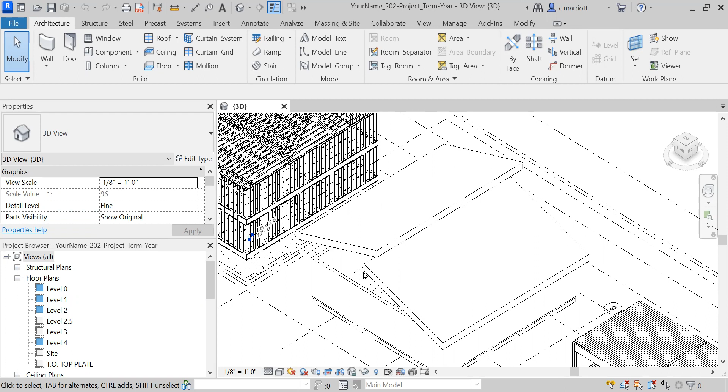In this next step, we're going to be adding some structure. So we have the walls for the metal framed structure in place, and we have these roofs. And right now there's no structural support for them.

If we go to section number 1 here, there is a footing that's located at the center of the structure. And so to support this, there's a number of ways that we could have done this. There could have been a bearing wall that ran down the middle of the structure, but if we want to keep it open, it may be better to go to a column and beam kind of configuration.

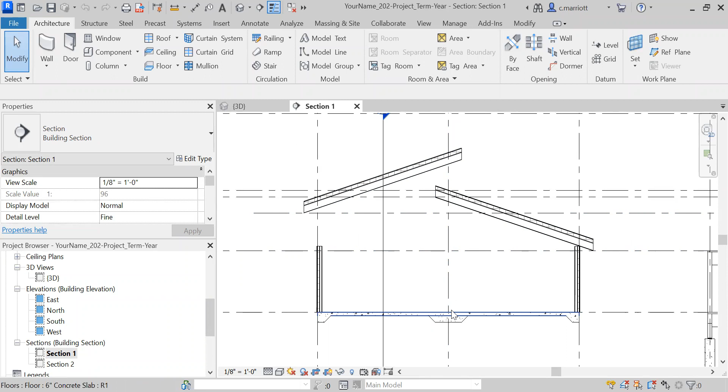So I'm going to place 3 columns going down the middle. I'll go to level 1 to show you where they're going to be. One column will be at the center, and then one column will be at the perimeter wall and this perimeter wall. So the first thing that we need to do is bring in some columns.

We could have framed this entire structure using the light gauge metal, but sometimes you'll find that you want, for some reason or another, to have a large opening or something like that. And so you might integrate other types of construction. So these will be made out of steel, not light gauge steel, but steel like you would frame an entire high rise in, for example.

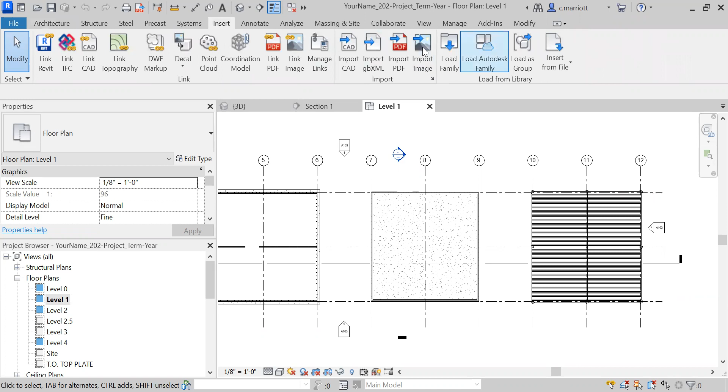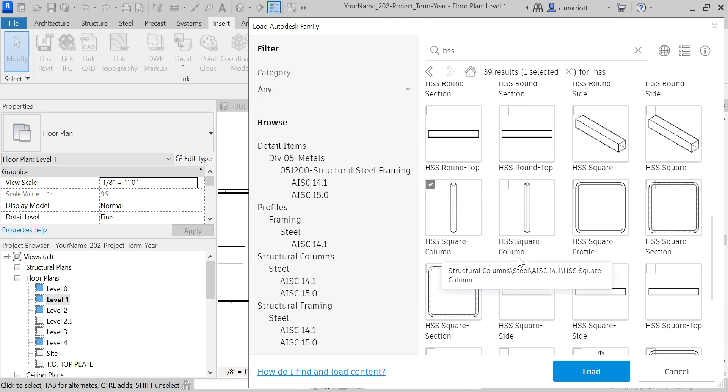So I'm going to go to Insert, Load Autodesk Family, and I've already started looking up HSS as a type of steel member. I'm going to scroll down till I get to HSS square column. I'll go with this 14.1 version. It probably doesn't matter. We're just starting off with some rough ideas about the sizes for these things.

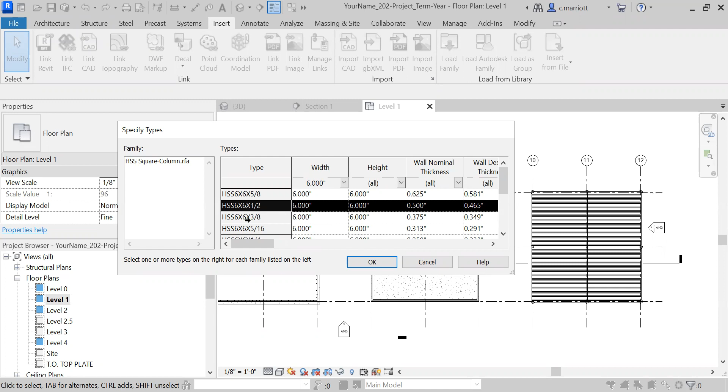And when the table loads here and I need to select one, I can narrow it down by going to, let's try for a 6-inch one. So when I click on 6 inches, I see anything that's 6 inches by whatever height. And then I see a number of thicknesses. Again, without going through all the structural calculations, I don't really know exactly how big this needs to be, but I'm using an approximation here. I'm going to go with an HSS 6x6 by half, and click on OK.

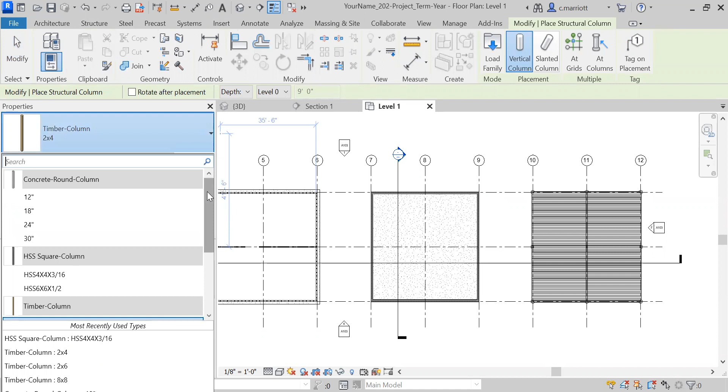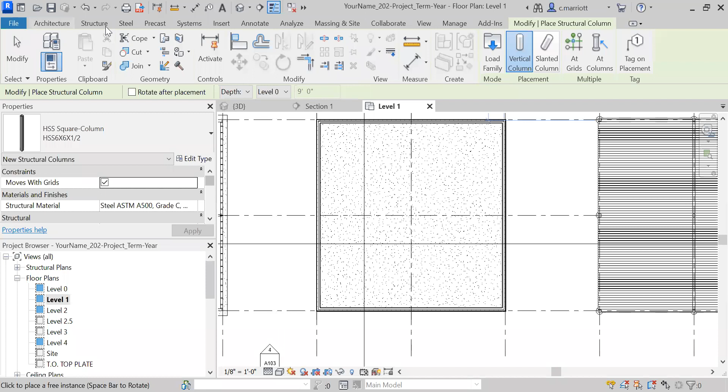Now I'm going to go to Structure and Column, and I should have a bunch of different columns in here. The one I want is going to be the one I just loaded in here, HSS 6x6, and I'm going to place it. It's going to be a vertical column. And it's going to go right here at the intersection of these 2 column lines. So let's see here. Did I fall out of that command? Yeah. And I'll click right here.

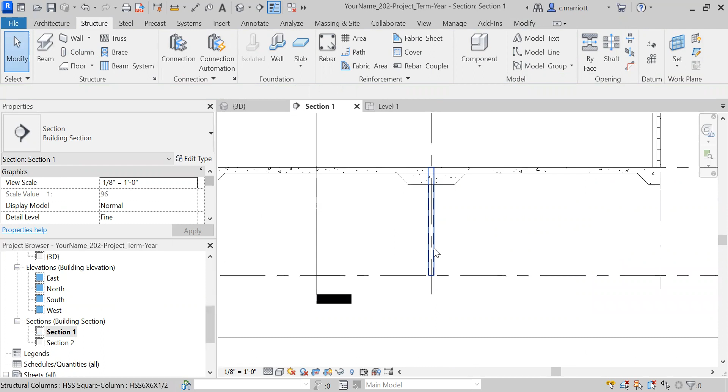And it's going to place one, but it's probably not the right size that I need. So let's take a look at how it is in section 1. Yeah, it's not where I need it to be at all. I'm going to click on that, and I'm going to start making some changes. I'm going to bring it up to level 2.5, and my base level is going to be level 1.

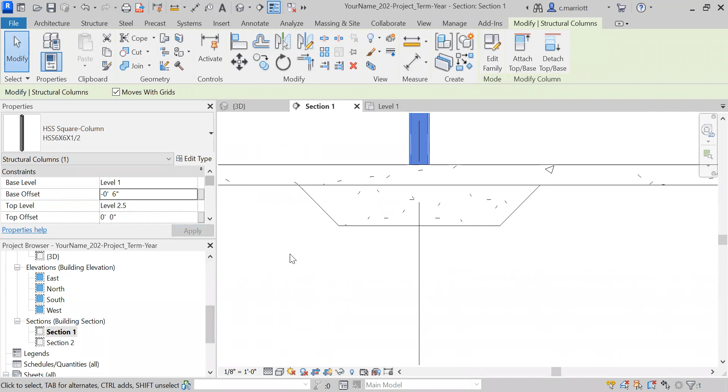Right now, the slab would probably be poured after this was located, and I want it to go down to where this footing is. So let's measure, our slab thickness is 6 inches. So I'm going to click on that column, and I'm going to bring it down -6 inches and apply. Okay, so now you can see it goes down to the footing. Maybe those footings needed to be a little bit deeper. We'll leave them for now as they are.

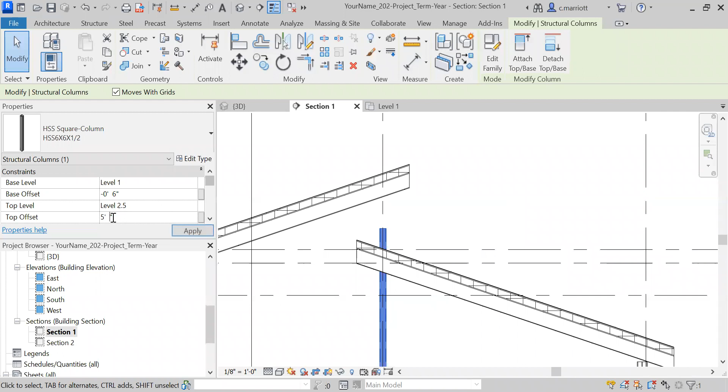And then I'll click on it again, and I want this column to go kind of all the way up here, and it's going to support another member that I'm going to bring in. But for now, let's just assign a dimension for it from level 2.5. Let's bring it up to 5 feet 6 inches above there. Now, again, we may want to make some adjustments to that, but we'll leave that as it is for the moment.

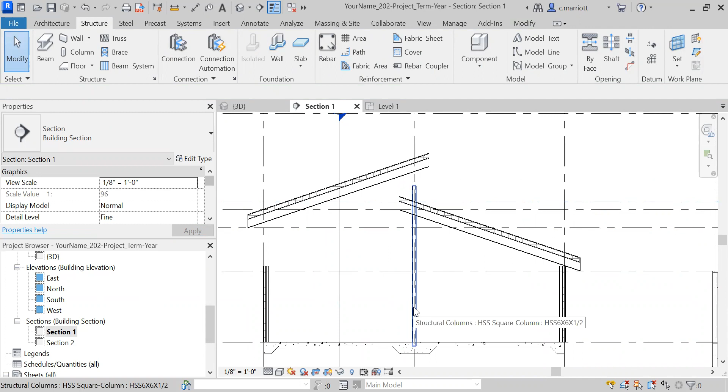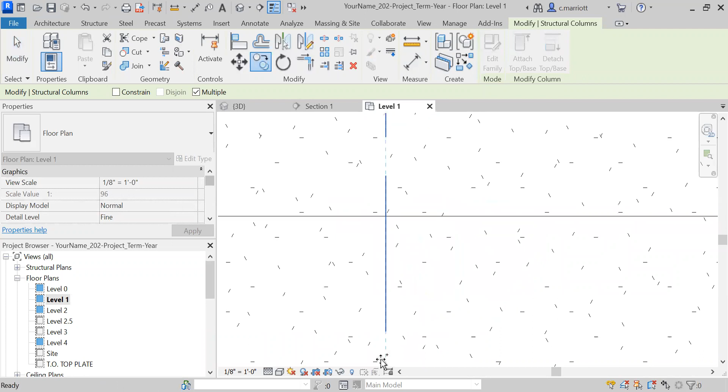And I'm also going to bring into this file some beams. But before I do that, let's make copies of this one. I'll go to level 1, click on it, copy, and actually, I'm going to copy from the face of that column, and I'm going to head down here. I want that column to be inside the insulation layer.

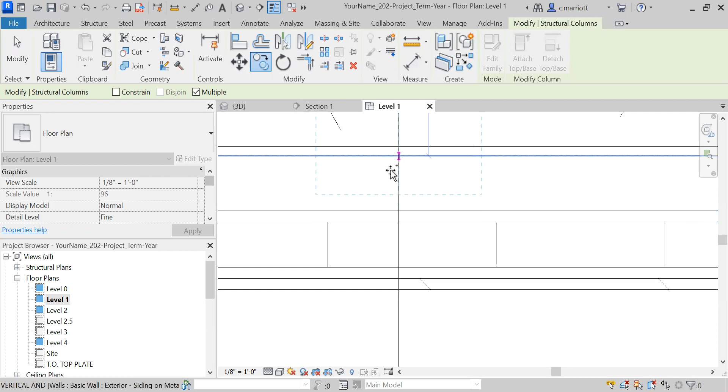So I can see here, I've got my siding, I've got the air gap. This is the insulation. There's a sheathing layer, and this is my metal framing layer. I'm going to put it in with that. So again, this is a metal component, and it is subject to the same thermal bridging as you have with the metal framing. So you can see that this column is a little bit bigger than my wall thickness.

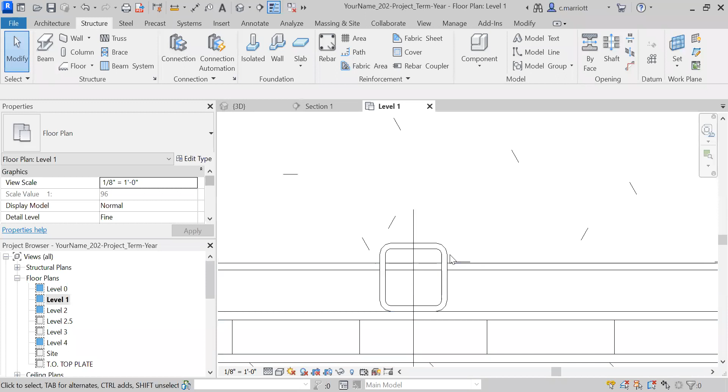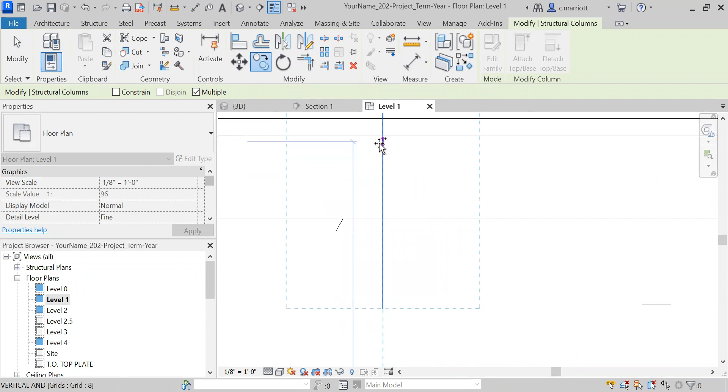If that bothered you, you could always make this a 2x6 wall. But also this could just have some drywall that wraps around it, and you'd see the column expressed on the inside of the surface. Now I'll do the same thing for the column that's going to be on the north wall. Copy from this point here, and I will bring that all the way over here. So again, it's sitting in the same layer as the metal framing layer.

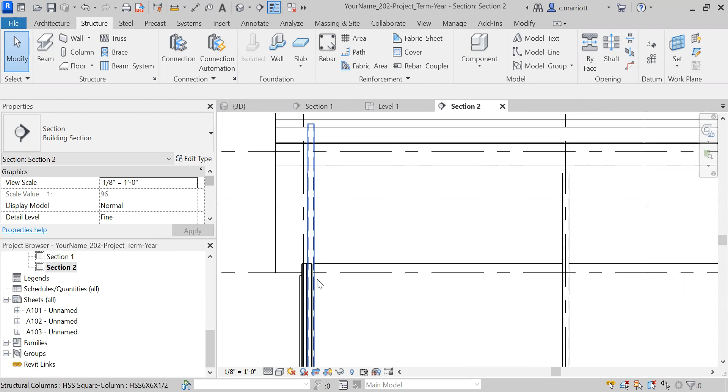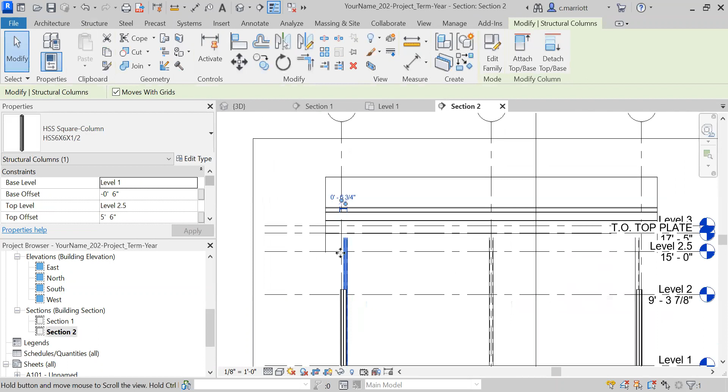Right, I have my section number 2 here. I can go down there and take a look and see how it is. All right, it's not showing me completely everything because of the way that I have my window cropped. I can go to level 1 and I can pull this in a little bit, so I'm only seeing the parts of the structure that I want to. Section 2. Okay, so there is that column, and you can see it's not going all the way up to the top, but we'll make any corrections in the next pass.